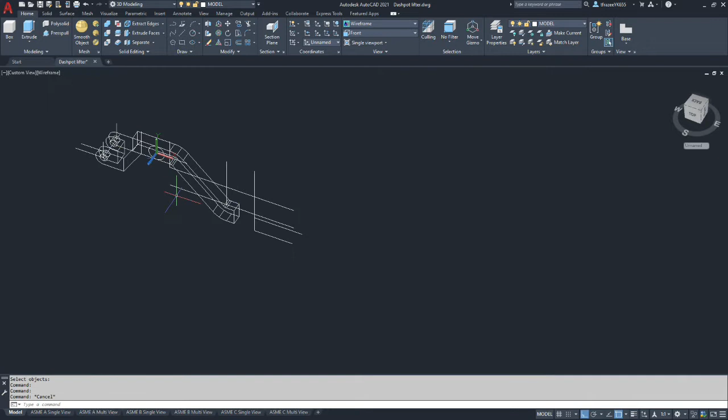Okay, now I want to create the boss that makes up this feature here on the top. It is 27 millimeters total in width, but it has a 10 millimeter distance on the back. So that means that if we subtract 10 from 27, we get 17, and the width of the bar is 14, which means it's going to extrude towards us by 3 millimeters.

And we're going to do an extrude based off this circle. We're going to hit enter, and we're going to go 24 millimeters. And then we're going to see if we can do a press pull, holding the shift key down and selecting two regions. And we're going to come out the front 3 millimeters.

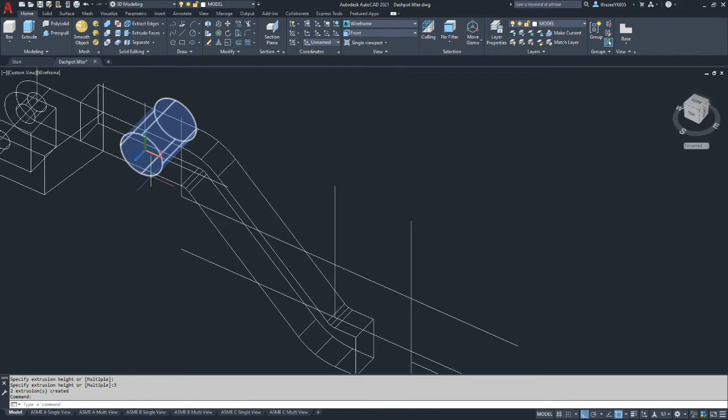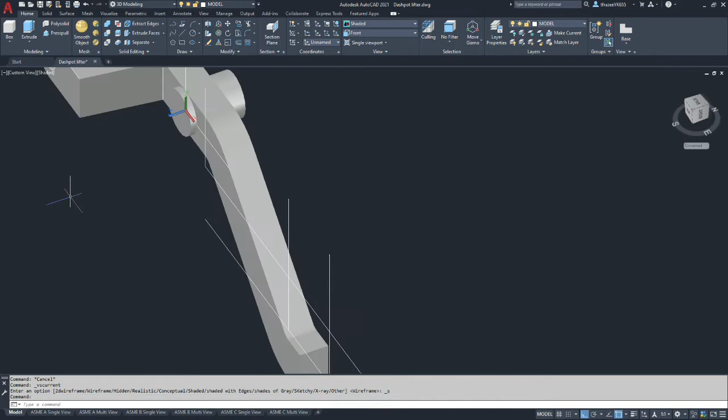Okay, so if we did it correctly, we've got the cylinder here, and if we were to shade it, we've got a boss on both sides, but it's sticking out the back more. Let's do a union between the cylinder and the main body. And we now have all one piece.

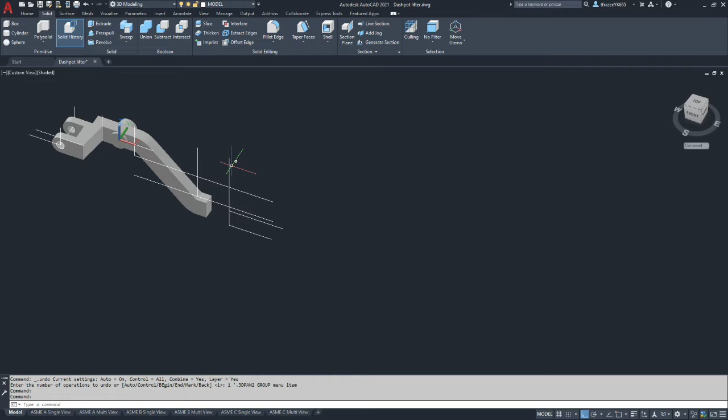Alright, so we just have the clevis on this end, some pockets on both sides, and then we have a whole lot of fillets. Okay, so we have all these construction lines we've already placed. This vertical line represents 140 millimeters from the center of this hole to the center of the 13 millimeter hole in the side of the clevis. The position of everything else is pretty much dependent on that.

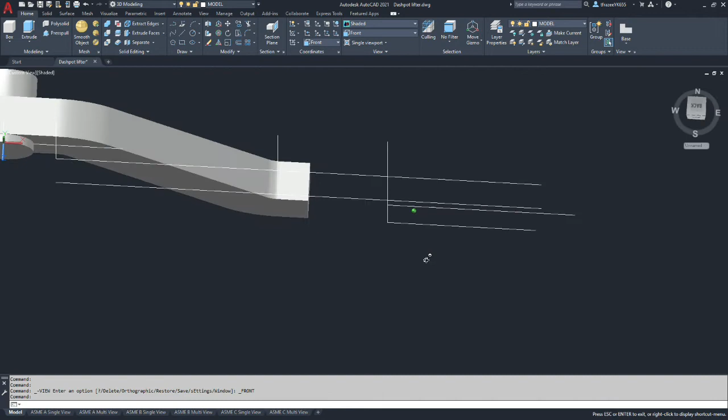So we're going to go to the front view. World Coordinate System, front view. But I'm going to rotate my view back a little bit. Now I want to operate in a plane where I'm drawing based off the drawing. So the position of the clevis in the top view is based off a 12 millimeter dimension coming off of this corner here in the back.

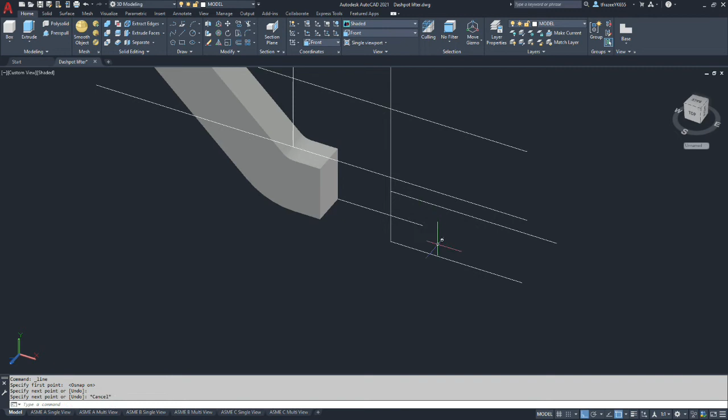So what I'm going to do is I'm going to draw a line from the end point of this back corner. And we're going to switch to the top view, and I'm going to offset that line by the 12 millimeters that's on our drawing. Okay, so that's the plane we're going to work in, but we're going to work in the front view now.

Alright, so just so we don't have any confusion, we're going to delete that construction line. And we'll start modeling our shape. Okay, so we know the top of the clevis flat spot is the same height as the bar, which is 22 millimeters. So we're going to offset the bottom edge by 22 millimeters. We connect the left, and we've got our left edge in 3D space where that clevis is going to be.

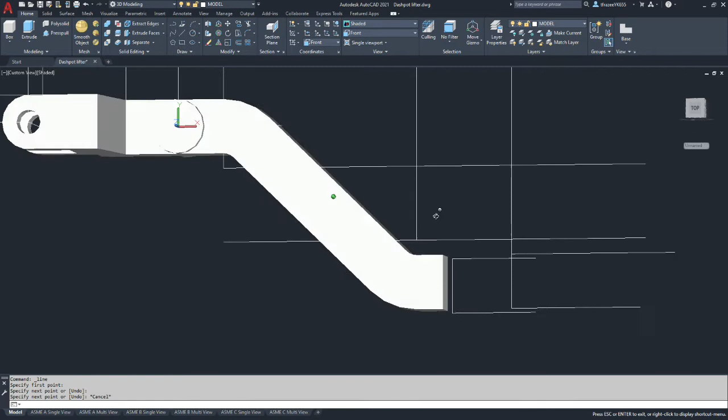Alright, now we need to figure out what's going on the opposite side. So we know that 29 millimeters from this edge, it should be the center of our 13 millimeter hole. So we're going to offset 29 millimeters. But we don't know for sure where the height is. So let's study our drawing.

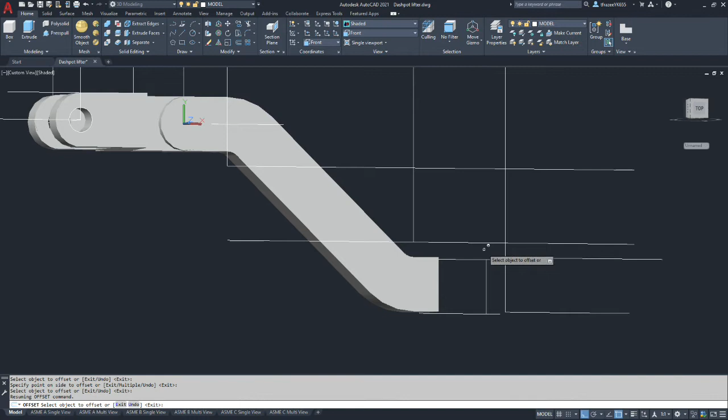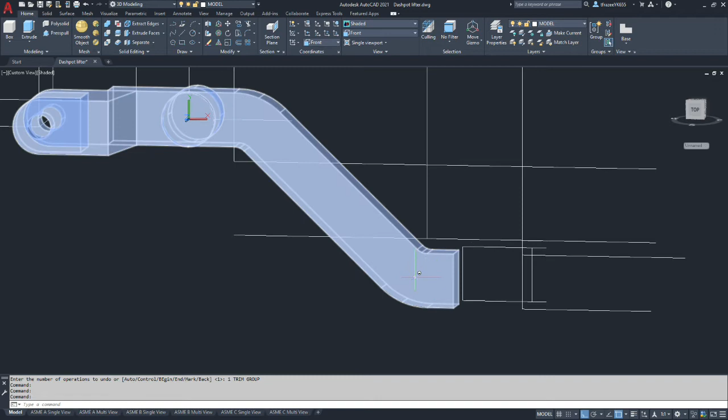So we have a tangent radius. So we know we have a radius 12 from the 29 line. This is 29. We know we have a 12 millimeter radius, so the extents of our part is 12 millimeters from that edge. So we're going to offset 12 to the right. Okay, now let's extend the edges so we see our box.

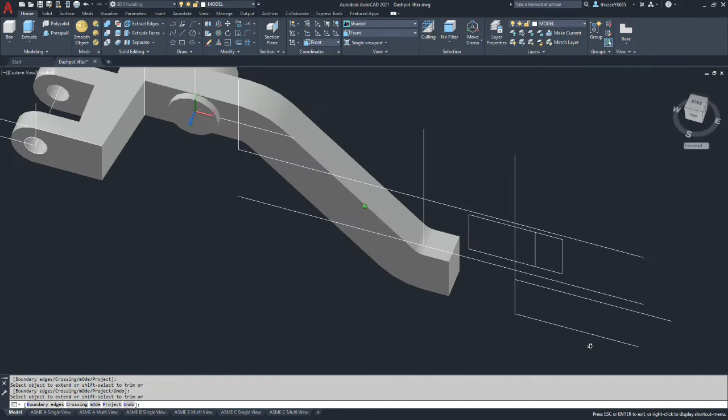Okay, at the point where the 19 millimeter radius that comes tangent to here hits this edge, defines where the center line of the other circles are. So we don't know where the center of that arc is, but we know it's 19 millimeters to the left of here and 19 millimeters up. So if we were to offset 19 millimeters, the radius from the bottom to the top, this should be the tangency point of where the R12 times 2 meets the R19 times 2.

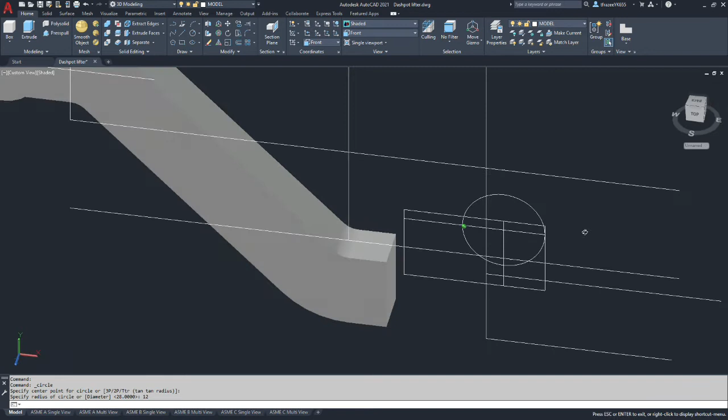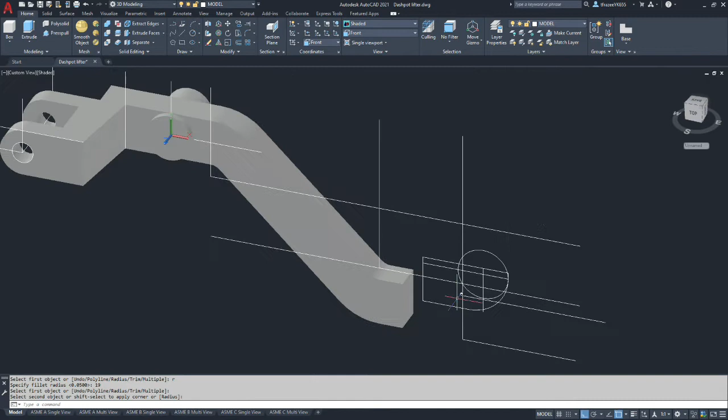If I were to draw a circle on this intersection with a radius of 12, it should intersect with that tangency point. We've now found the center of this arc based off deductive reasoning of the 19 millimeter radius. So let's go and put in our fillet. It's going to be a radius of 19 millimeters, and double check our work. There we go. So the 19 millimeter arc comes up, it hits tangency here, and that defines where the center of our 12 millimeter is. So it was dimensioned, you just have to get to it in an indirect way.

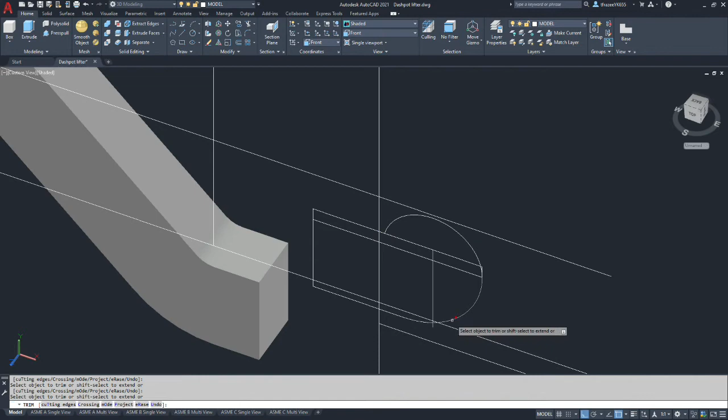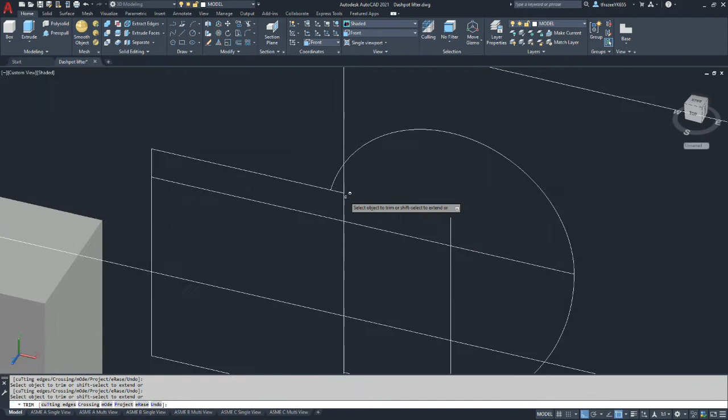Okay, so let's trim up that geometry. Trim. Okay, we don't need this piece of the arc. We don't need this piece of the arc. We don't need that piece of the arc. We don't need this piece of the line, that piece of the line, that piece of the line, or that. So we should have a smooth blend there, and trim off that piece of the line.

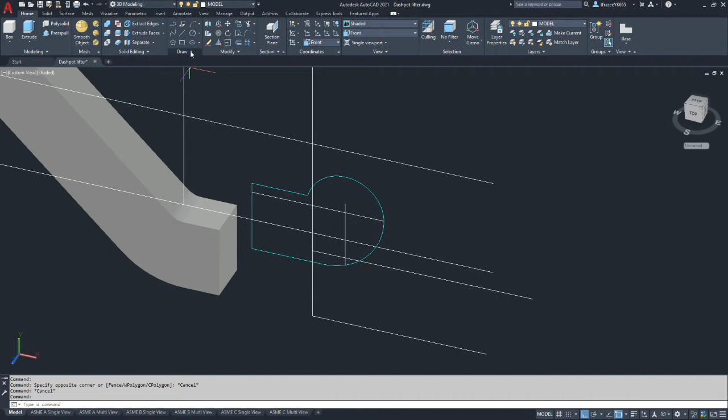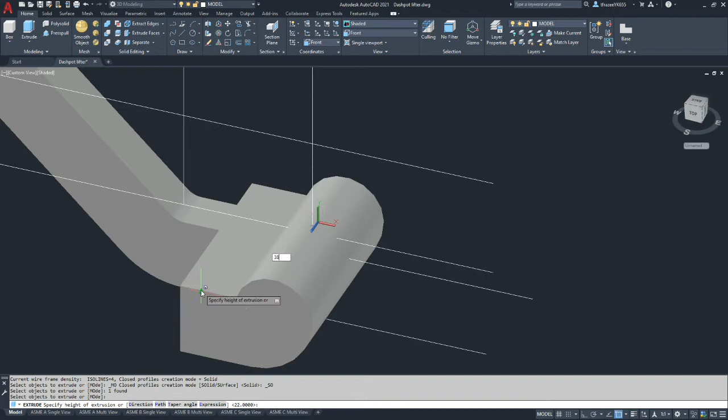So like I did before, I'll move the profile we need to extrude to the construction layer so you can see it. So if I select the elements we have, it should be those elements, and we're going to move them to the construction layer. Okay, so the cyan lines are going to be what we are going to extrude. Let's make a region out of those. And then we're going to do an extrude on that region, and we're going to come forward 38. So that piece should be located in space correctly now. Now let's do a union between that component and the rest of the model.

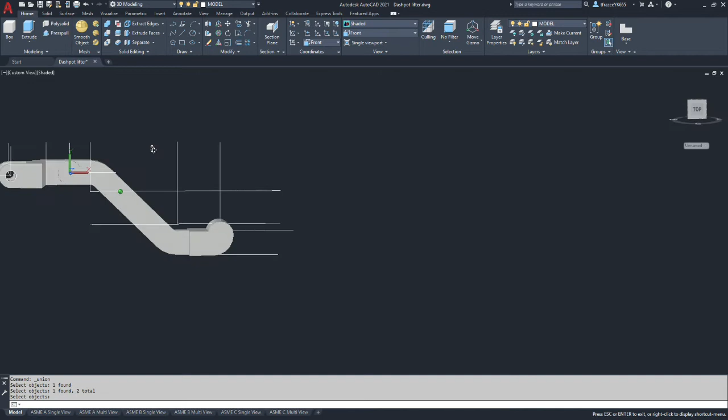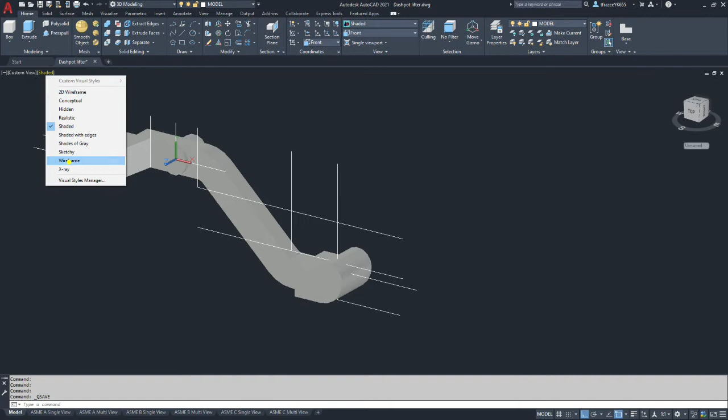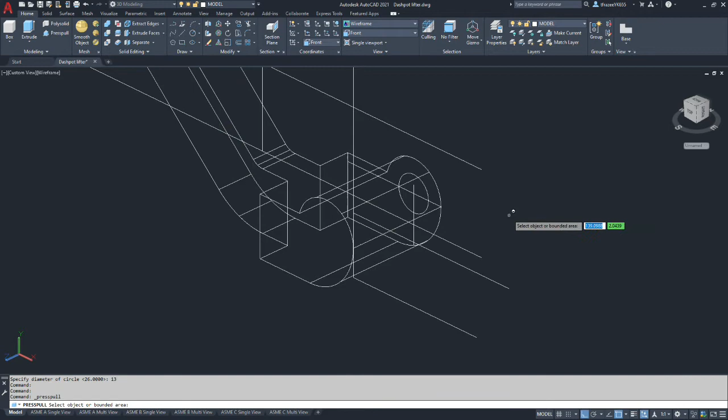Alright, so we now have most of the dashpot lifter. We need to put in 2 holes and 2 pockets, and then that's all fillets after that. Okay, so I'm going to move out of the shaded mode here, go back to wireframe. We still have our intersection of where our hole should be in the back here. Let's put in a circle with a diameter of 13. Then we're going to do a press pull, holding the shift key down, which will allow us to select more than one region, and go through our part that way, 38. Okay, we should have a hole, which we do.

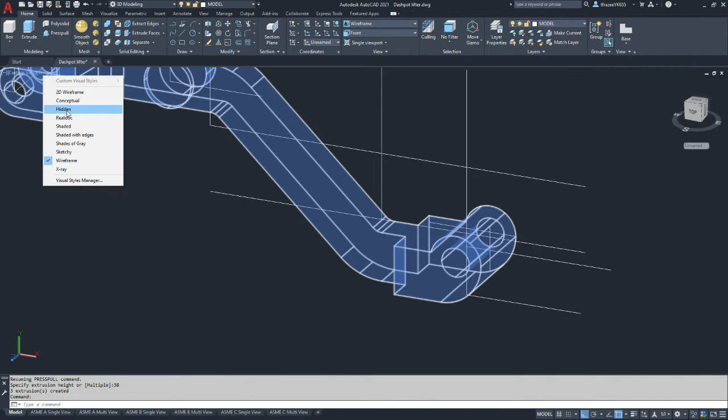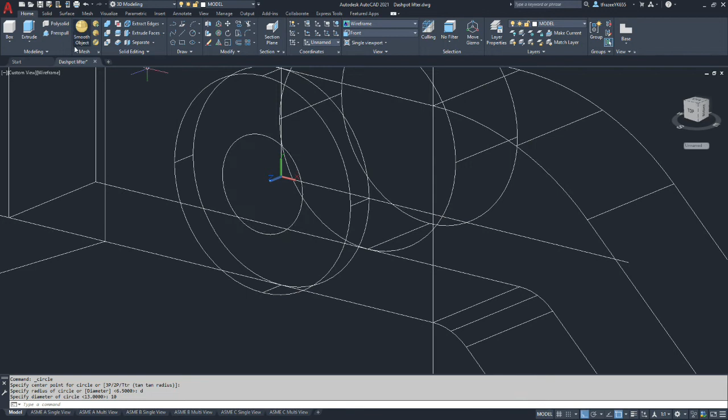Okay, let's go do our other one. We're going to do a circle, pick up on the center of the boss, and it's a 10 millimeter diameter, so diameter 10. And now we can go press pull. We're going to pick on the center of that, and this one's 27 millimeters. And we should have a hole there now. Alright, now it's time to make the pockets.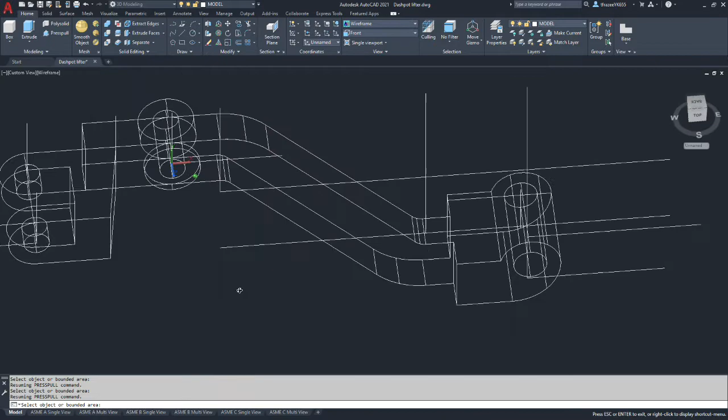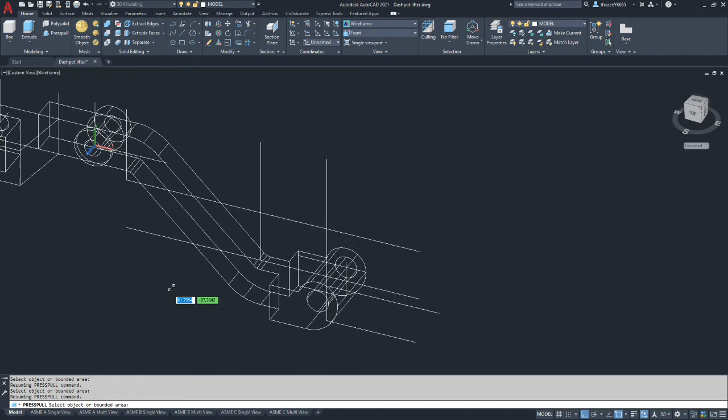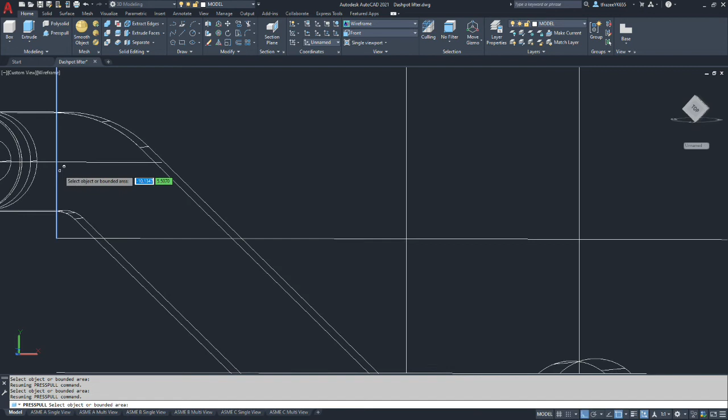Okay, the pockets. There's an error on the drawing. It calls out an R8. It should be an R7. If you do the math, an R8 won't fit where they're calling it. We're already in the front view, and we're going to draw on this plane on the front. So at this 41 millimeter line, at the center, we need to put in a circle at the intersection here, with a radius of 7.

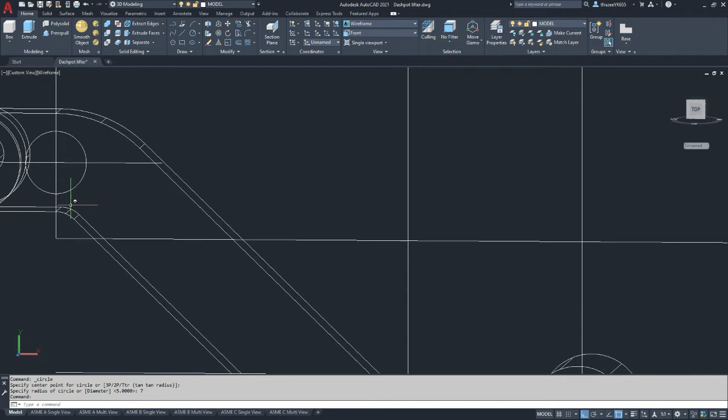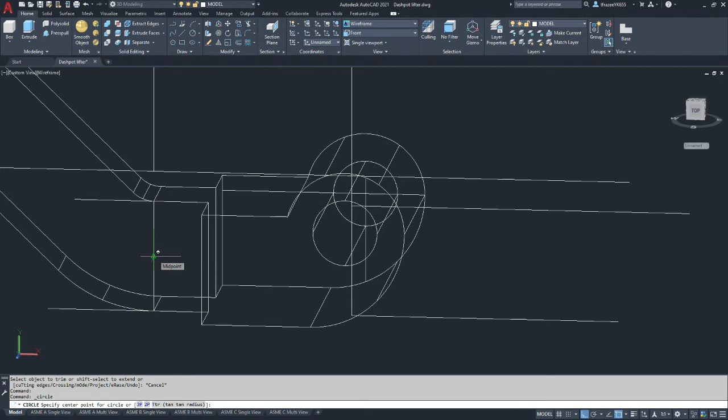We then need to come down here, and at the intersection of 81 millimeters and the center of the width of this bar is another one. So I'm going to draw a line from edge to edge. That's our 22. We're going to extend this line down, and if we then trim off the piece in between, the segment in the middle we can use to measure where the circle is. So we're going to pick on the midpoint of it and put in our 7 radius circle for the bottom. Okay, let's go ahead and delete some of these lines here.

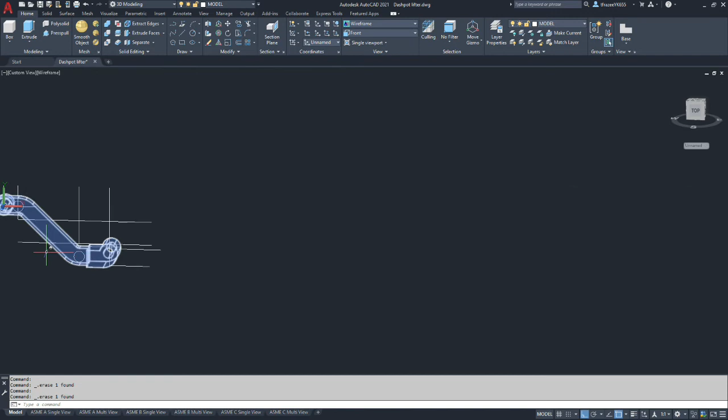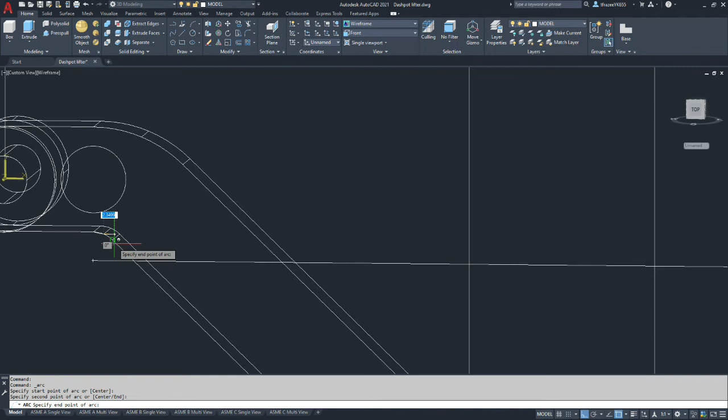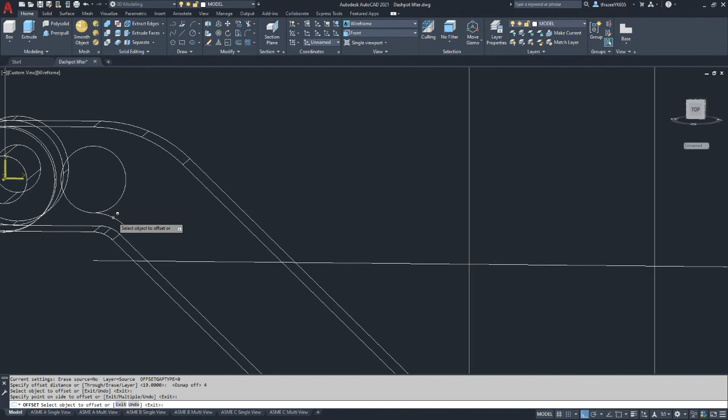Now, if I create a 3-point arc, picking up on the edges of our 6 millimeter fillet, I should be able to offset that arc by 4 millimeters. If we look at our cross section, it's an R2. So if you multiply that by 2, the offset is 4 millimeters. And so we should get an arc that should hit tangency with the circle.

And then we can do the same thing on this top arc. I'm going to turn O-snaps back on, but endpoint, endpoint, endpoint gives us a 3-point arc that we can then offset by 4 millimeters. And we've gotten a consistent wall thickness here.

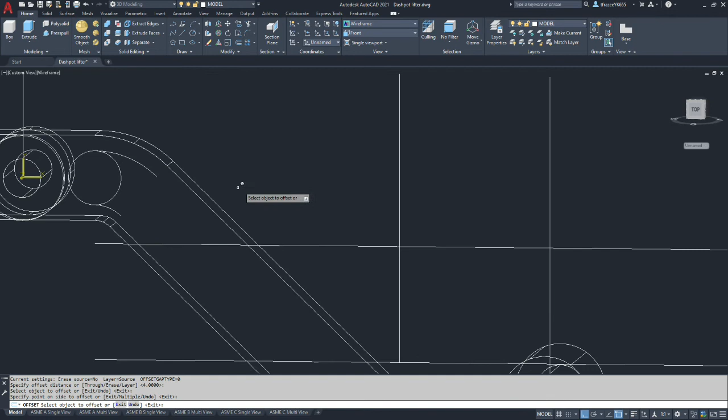Alright, so we're going to repeat that procedure down here at the bottom. We're going to do a 3-point arc. 1, 2, 3. I'm going to repeat the command. 1, 2, 3. And then we can go to the offset command. It's going to go 4 again. Okay, we're going to offset by 4 the top one as well, if we can find it. There we go.

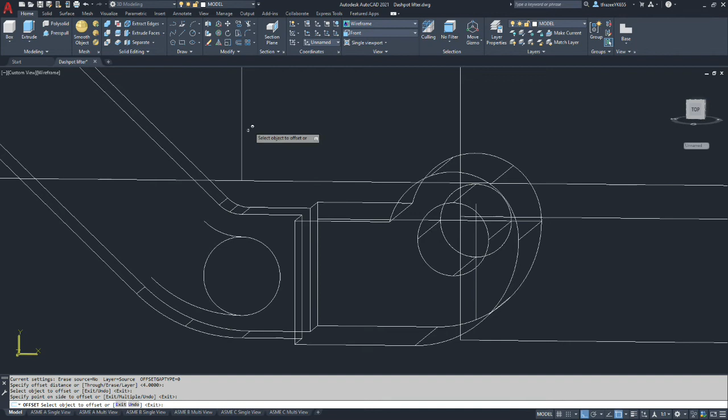Alright, so at this point we should be able to trim up the center of both of those. And then now we just need to draw tangent lines between the two.

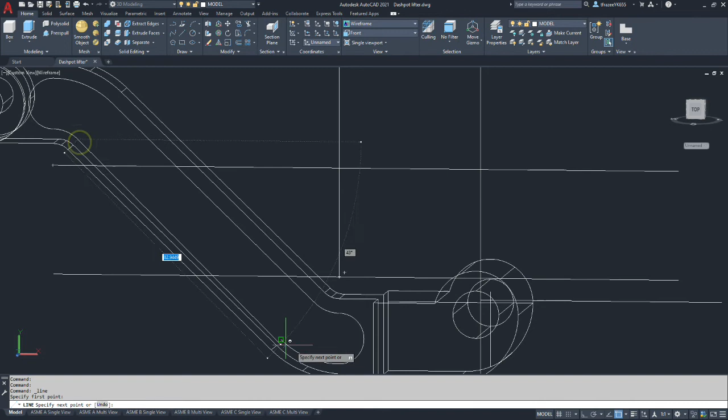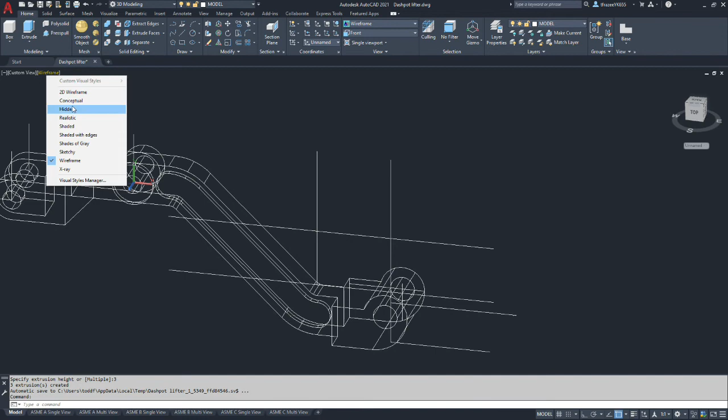Okay, so now I'm going to use a press pull command, holding the shift key down, so I can select the 3 regions we want. And I'll hit enter to accept that, and it's going to go in 3 millimeters. So we now should have a pocket that follows the shape we need. Now we need to have that same pocket on the opposite side.

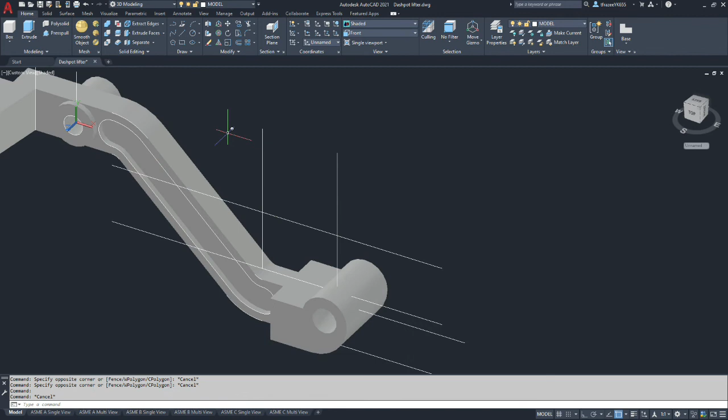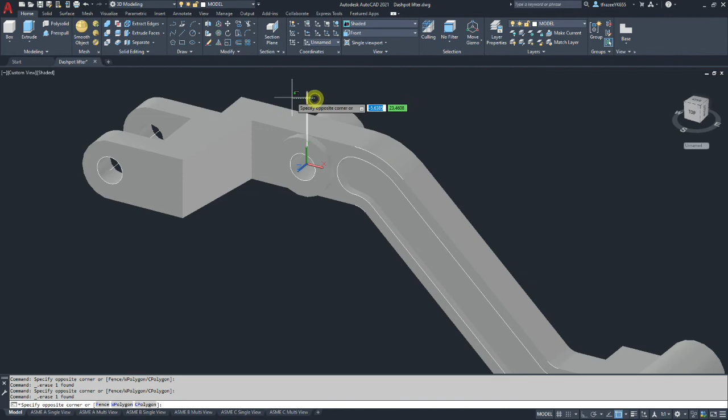Now there's more than one way you can approach that. Move copy and just press pull it from the other side, or you could mirror it if you set up a 3D mirror plane to use. I think I'm just going to copy the geometry. I'm going to get rid of most of this construction geometry that's floating out here. Clean this up a little bit. You go to a wireframe view.

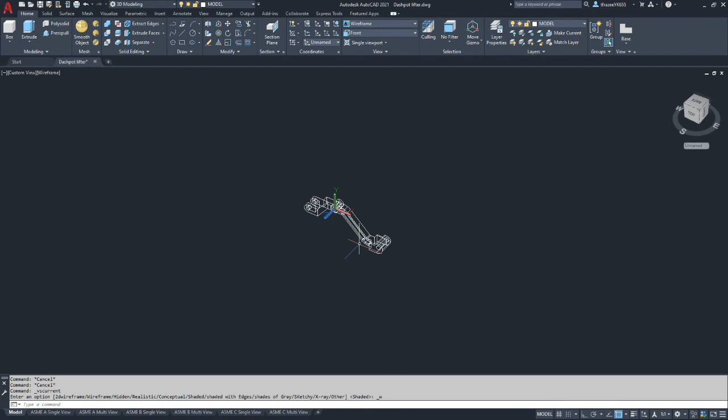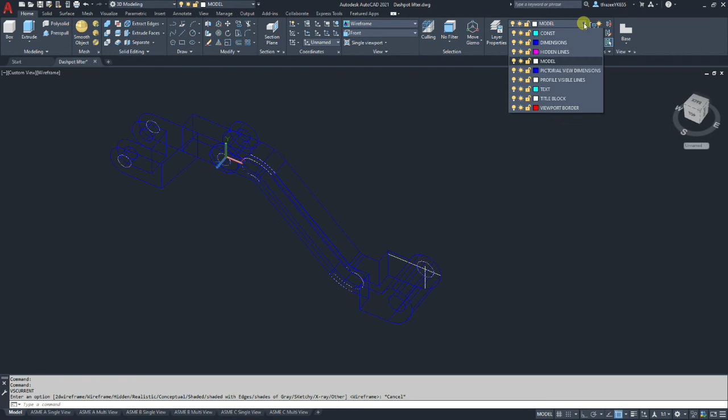Okay, so this has gotten busy enough, and I probably should have been drawing all my construction geometry in the construction layer. So what I'm going to do is temporarily move my model. I'm going to pick on the model, and temporarily move the model itself to the pictorial view dimensions layer. Now I'm going to hide that layer, and that will allow me to select all of this stuff and move it to the construction layer so that I can see it in blue.

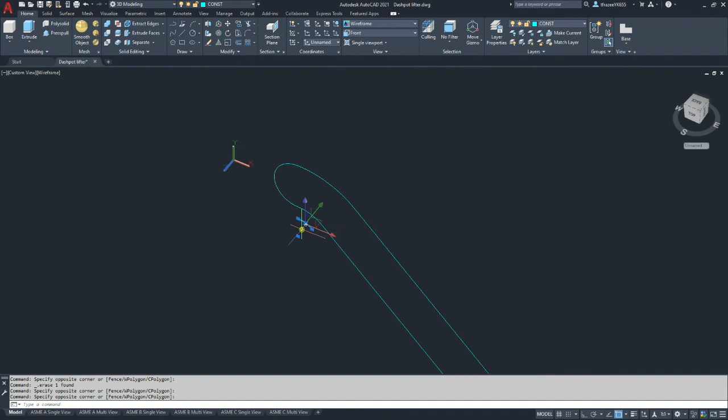Okay, I don't need these circles anymore. I don't need this radius, that radius, or that radius, or that radius. Okay. So there's actually nothing in the model layer at the moment.

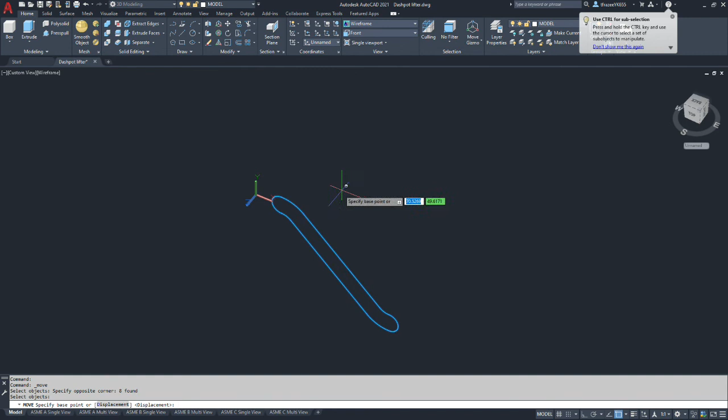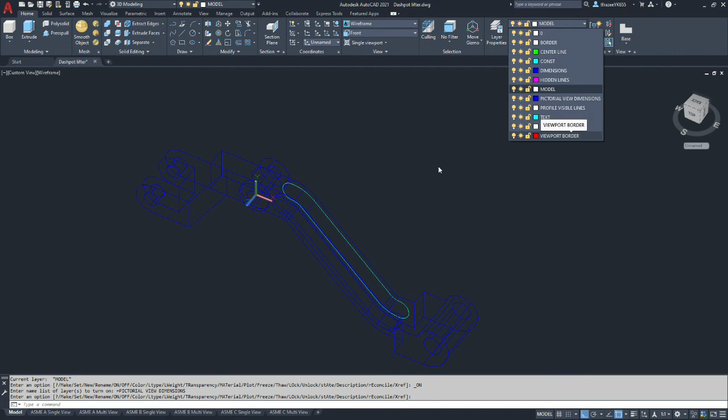To generate the pocket on the other side, I'm going to take this geometry here and move it. So I'm going to do a move from a point I've selected, with ortho on, 14 millimeters. We're going to go to our layers and make pictorial view dimensions visible again. And we'll select our model and move it back onto the model layer.

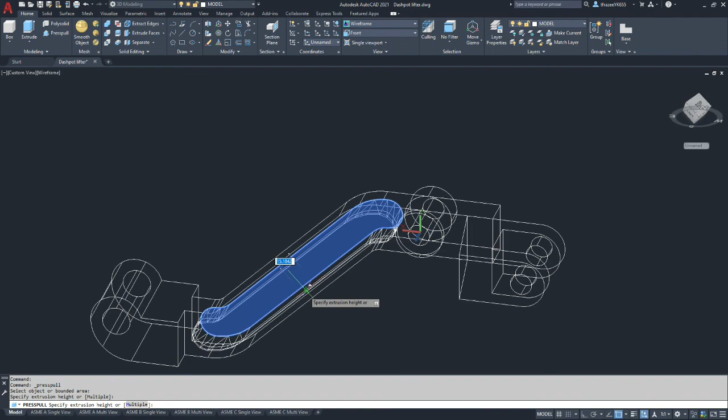There we go. Alright, so I've now moved the geometry I used to do the first press-pull to the back side of the part. So now I'm going to do a press-pull from the opposite side in, and that's going to go the same distance, 3 millimeters. So we go back to conceptual and we should have our pocket on both sides.